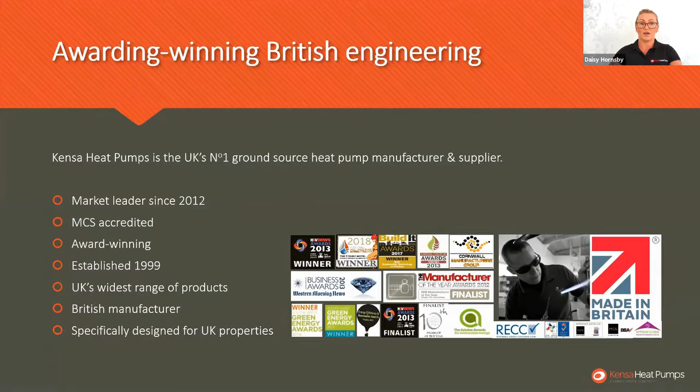So Kensa as a company, we have strong links to the Department of Energy and Climate Change, and we have significantly contributed to government policy. We seek to secure helpful policy outcomes to underpin further growth in the ground source heat pump market. Essentially, we believe that we can deliver the lowest cost and lowest carbon heat to the householder, and we also believe our technology is central to the lowest cost decarbonisation pathway.

So, as I'm sure you're all aware, we have certain emission targets that we need to meet. We're looking to be net zero by 2050, and we believe ground source heat pumps are going to be the way forward to help us get to our targets.

Now, preparing for a future without gas. Certainly in new build housing estates, we're seeing more and more that renewables have to be a part of building regs moving forward. So an alternative fossil fuel may not be an option. It's a case of the carrot and the stick philosophy really. At the moment it's very much the carrot. There's lots of incentives in place to consider the uptake of renewables.

But moving forward, in the fullness of time, there may not be that funding available. So it's going to be more of a stick, you're going to have to do something renewable as opposed to using a fossil fuel. So now's a really good time to look to do this.

Now further to this, we've also got smart controls and time of use tariffs, which can be integrated with our heat pumps. The smart controls can be used with Kensa software that is built into the heat pumps. Basically it helps you with time of use tariffs. It helps occupants make best use of dynamic tariffs, as the smart controls will predict and learn how the user wants to use the heat pump.

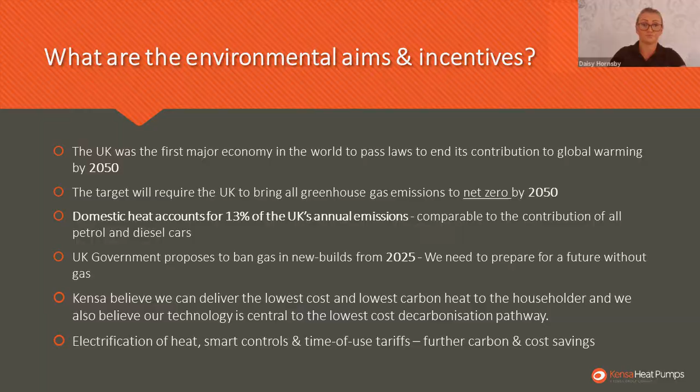So why choose a Kensa heat pump? There's no need for any additional heating, so you don't need to have a backup boiler. We'll size it to meet 100% of your heating and hot water load. Heat pumps are very efficient, using minimal electricity to generate high temperature heating out of low grade energy. So this means that potentially you can reduce your heating bills by up to 50% compared to oil and LPG.

Off the back of that, you also have the renewable heat incentive, the most generous tax-free income that the government have put in place for the uptake of renewable technologies. It's got a low lifetime ownership cost, so there's very little ongoing maintenance cost associated with the heat pump. It's safe and non-combustion, so there's no gases that come from the heat pump itself, so it's safe to go inside the property.

It's also got a high COP, meaning the seasonal coefficient of performance is high, so for every kilowatt of electric you put in, you potentially get 4 kilowatts of heat out. Depending on your setup internally, ideally underfloor heating or oversized radiators, to accommodate as low a flow temperature as possible to maximise your RHI payments. The heat pumps themselves have a 20 to 25 year lifespan.

The ground arrays will last about 100 years. So they're really reliable and robust. Unlike most boilers that would need replacing every 5 to 10 years, these really have a lifespan of 20 to 25 years.

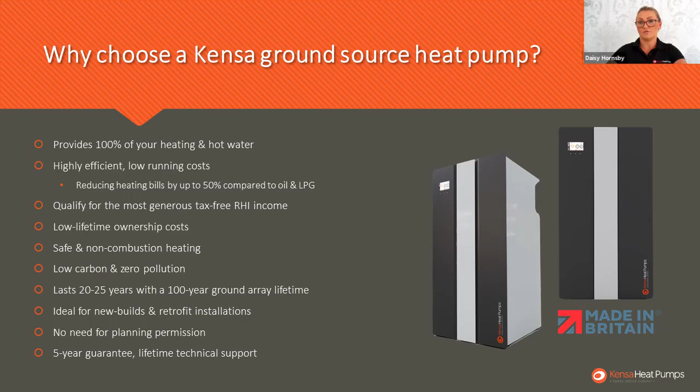Okay, so your funding options. As we touched upon just now, we have the renewable heat incentive. For self-build projects, we've got the domestic renewable heat incentive. It's basically been put in there for the adoption, the take-up of renewable technology in the UK to reduce carbon emissions, so we hit our UK targets.

The RHI is calculated to cover the majority of the equipment costs of your ground source heat pump, as well as some of the installation costs. As we mentioned earlier, the highest tariff is for ground source heat pumps to cover that higher capital and installation fee.

The domestic renewable heat incentive is a 7-year payback scheme, and it's payable based on the deemed heating and hot water usage on the property energy performance certificate. Now that's also coupled with the system efficiency. You get the most efficiency by ensuring that the building is well insulated.

So we always encourage you to insulate as well as you can, purely from an environmental perspective, but also to keep your running costs low. So you're not putting a lot of electric into the heat pump to make it work very hard. You want that heat pump just to tick over at a minimum output to give you the most amount of comfortable heat. So you want to keep that system as efficient as possible to get the most from your RHI payments.

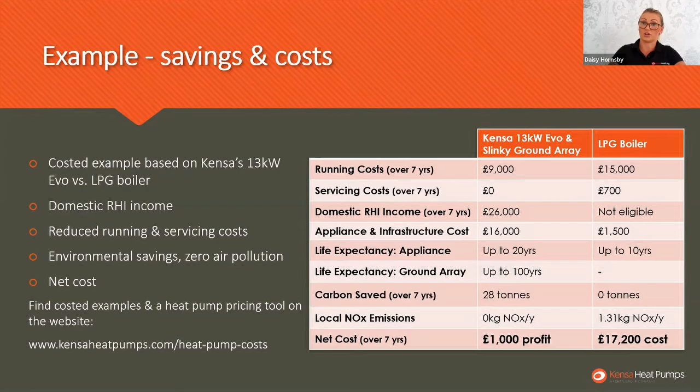So a little bit about how a ground source heat pump works. Effectively, the ground sits at anywhere between 6 and 10 degrees most of the year round. You install ground arrays, so effectively that's pipe that's put into the ground. You circulate antifreeze within that pipe. That pipe then transfers the ground energy to a refrigerant in the heat pump.

And within the heat pump itself, there is an increase in pressure, which raises the temperature of the refrigerant. And then this heat is transferred to a room via radiators and underfloor heating. So it's useful energy really.

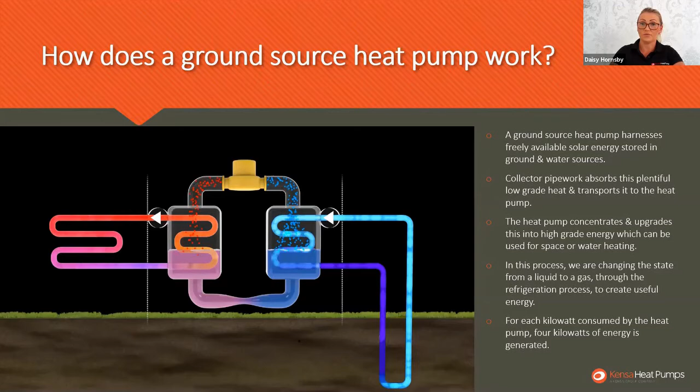Once that refrigerant has done its part by providing high temperature heating, it's then put through an expansion valve to cool. And then this process just carries on going. So it's a continuous cycle. It never really goes wrong and it never runs out. So it's a good, reliable, robust system.

Okay, so where do we get this energy? There's a variety of options available. We have the slinky ground array. If you have a paddock or a field nearby that you'd like to use, we can advise how many slinkies you're likely to need.

This can also be straight pipe loops as well. So the principle is still the same. You bury pipework in the ground about 4 foot deep, and you circulate antifreeze within the pipes, and you get around about 5 kilowatts approximately per slinky trench. And we can size that for you and advise what you'll need, according to ground conditions and the heat demand

of your house. If you don't have enough space for slinkies, we've got a borehole solution, so you can drill down vertically. So if, for example, you've got a small garden and you can't put a horizontal ground array in, you can drill down anywhere between 50 and 150 meters to absorb the energy from the surrounding soil. You typically will get, again, probably around about 5 kilowatts per 100 meters, depending on ground conductivity.

This option tends to be a fraction more efficient, but it is a bit more expensive. So just something to bear in mind when you're weighing up both options. You've also got the water source option. So if you have a lake, a stream, a river nearby, you can potentially utilize this. So you have the option of open loop. So you're physically extracting the water from this water course and passing it through a heat exchanger to take the energy from it. Or you have a closed loop system.

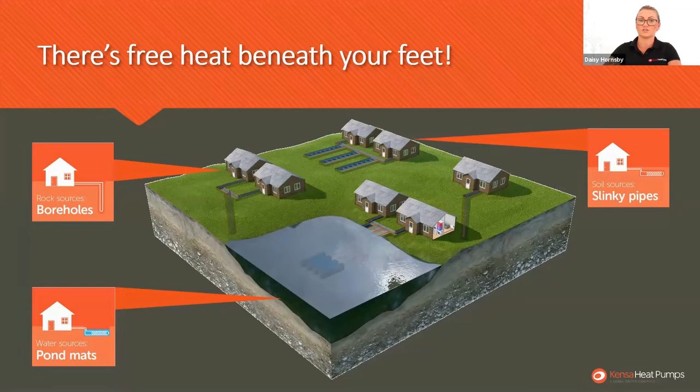So this is pond mats. And pond mats are similar in a way to slinkies, so it's coiled up pipe onto a frame, and then that's absorbing the energy from the surrounding water. So that does require a little bit more maintenance though, so not so much of a fit and forget system as the others are. So careful consideration needs to be given to that. But we'll look at all possibilities with you, and we can discuss each project on its merits, and we'll look at each of the options to get the best return on your investment and best system for you.

So Kensa's award-winning product range. So we have 28 variants across all ranges. So ranging from a 3 kilowatt shoebox. So these are designed to go in flats, small passive houses, and also boats as well. We have our Evo series, which is designed generally for the domestic market, so for new builds and large retrofit properties. Twin series for our larger properties that require a slightly higher heat demand, all the way up to our plant room heat pumps as well. So we've seen applications in offices, schools, golf clubs.

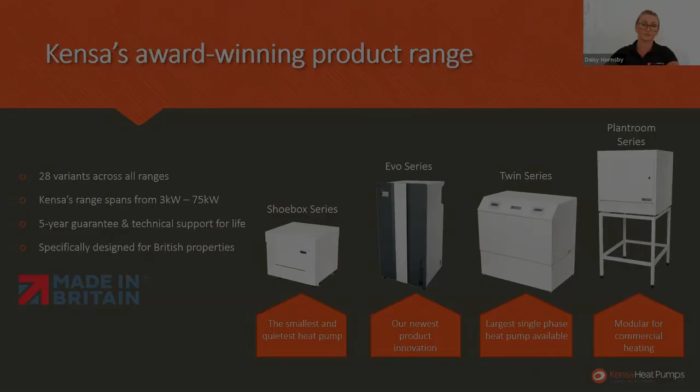So in response to market demand, we have developed our latest range of heat pumps, which has been well thought out, and it's developed based on 20 years of customer and installer feedback through innovation and research and development. So we've come up with our Evo series, which has been an extremely popular heat pump. The benefits of which, so it's extremely efficient. So the A++ will absolutely maximize your RHI income.

So with the highly efficient system, if you have your heat emitters sized to accommodate a low flow temperature, you've well insulated your property, and as well going on a time of use tariff, these will absolutely maximize your system efficiency. So you'll get the best return on investment through your RHI and also experience the lowest running cost possible. It will deliver high temperature hot water, typically about 60-degree hot water, so there's no need for an immersion backup. It's got a smart system manager as well in it, so that'll also optimize performance.

So that means it's got built-in software specifically designed for this unit. So it also has built-in diagnostics, so it preempts any system irregularity, performing a system maintenance check, and it all helps keep ongoing maintenance to a minimum. They're also very, very quiet. So they've been built with sound in mind. So they've got industry leading sound levels. So they're very, very quiet. They're then designed to go indoors, so inside the property. So they don't have to be kept in a garage or an external enclosure.

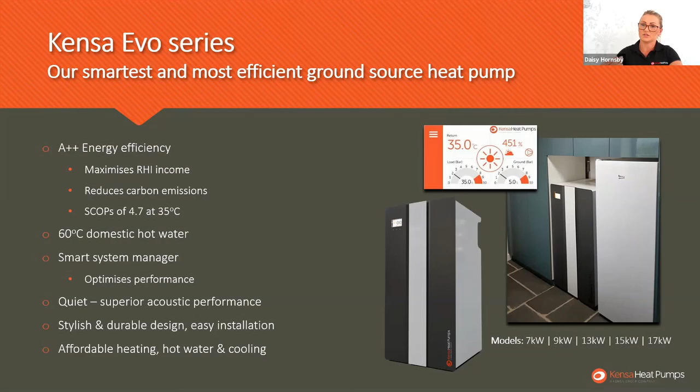Further to this as well, Kensa have always liked to keep installation and the heat pumps themselves easy to install. So with that in mind, it's been developed with simplicity and ease of commission, really. So then it can be commissioned over the phone with one of our Kensa engineers. And the connection location on the heat pump itself makes it quick and easy to install, and it's flexible on site, so it doesn't have to go in one particular area. So it's very much been designed with ease of installation and use in mind.